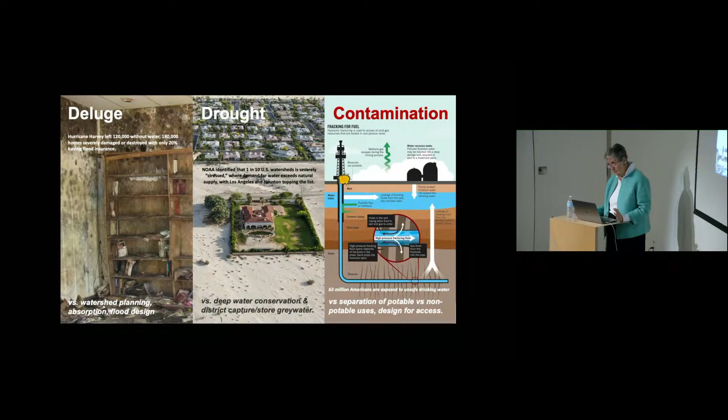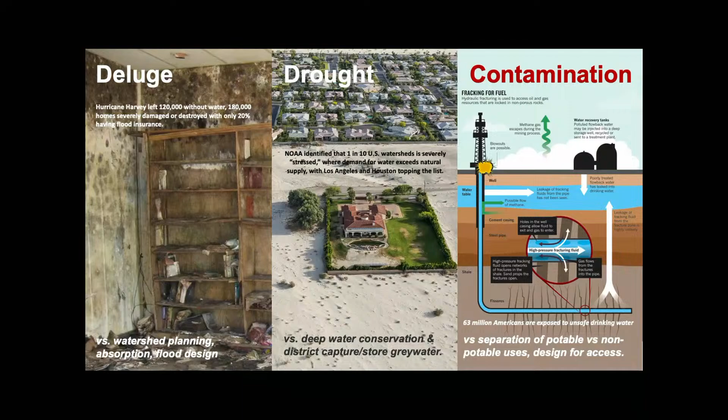So water resilience, what could possibly go wrong? There are at least 3 different variables we have to design for. One is deluge, both deluge rain and rising water. Second is drought, and the third is contamination. All 3 of these are pervasive in the world around us.

The important thing is to actually establish principles for design. Through the crowdsourcing, we've not only set principles, we've actually set some priorities. We're in the process of trying to create a book that would capture all of these good thoughts.

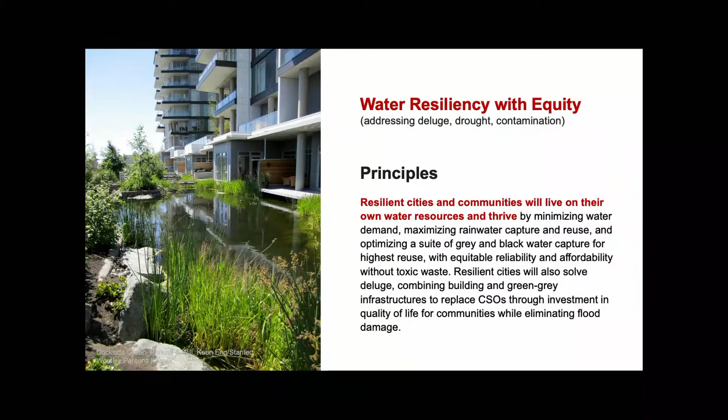Resilient cities and communities will live on their own water resources and thrive by minimizing water demand, maximizing rainwater capture and reuse, and optimizing a suite of gray and black water capture for highest reuse with equitable reliability and affordability, and without toxic waste. So that becomes a guiding principle.

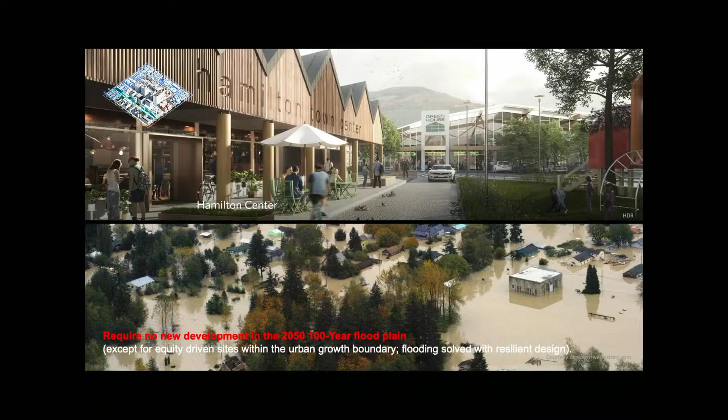What it ends up meaning is that we require all new development stay clear of the 2050 100-year floodplain. In other words, we no longer develop in floodplains, and we actually start to redevelop things that are in 100-year floodplains. Unless they're incredibly historic cities like New Orleans, we need to begin to help these cities move and relocate.

This is an example in Oregon of a town that was completely devastated by heavy rains, and the new town that has been built since then.

We would require that recycled water only is used for irrigation, toilets, fire suppression, and cooling towers, which, by the way, is a huge amount of the water we use potable water for right now, the water we need to drink. We would also incentivize a network of district or neighborhood black water systems, so you process black water locally instead of shipping everything back to a central sewage plant and water processing plant.

I want to share some illustrations. The profession is so far ahead of academe, they are absolutely embracing these standards. This is an example of Phipps Conservatory, a living building in Pittsburgh designed by the Design Alliance with CJL Engineering, Andropogan for landscape, CEC for civil infrastructure, and Turner Construction. By the way, it takes a team to make a resilient solution. It is never the architect alone; it is always the collaboration from the outset that makes these projects.

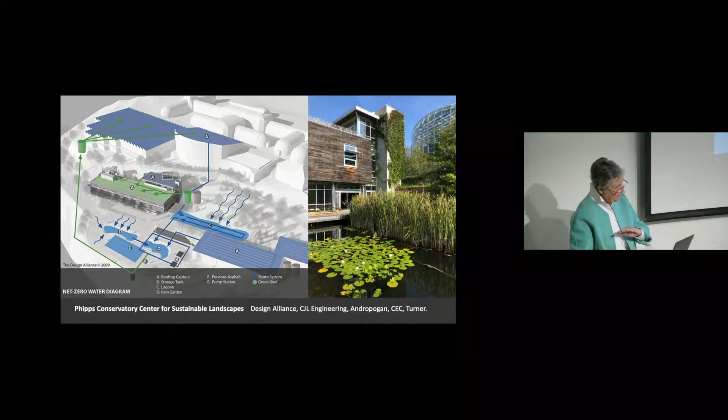This net zero project captures all of its own on-site water. It uses all of its gray water and storm water for all 4 of those things we just talked about, and it captures its own sewage and processes it back into gray water as well. So it's a closed loop system that's truly an innovative contribution.

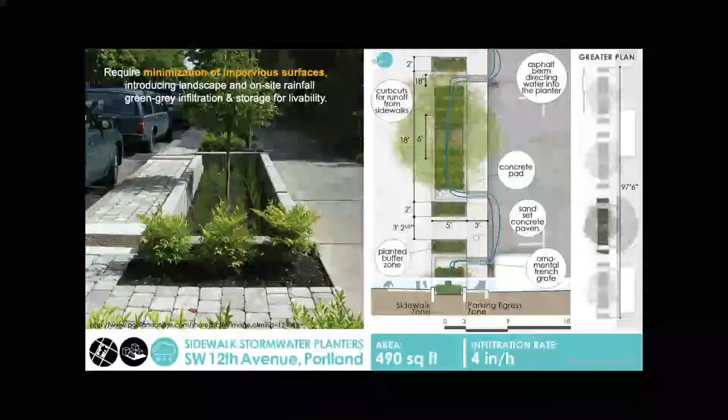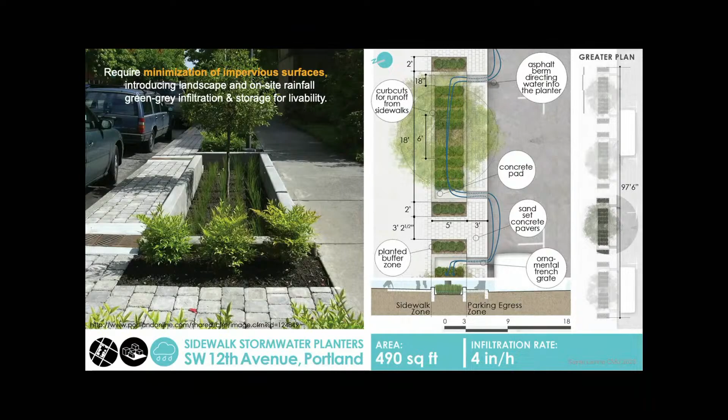Just a few more examples of water solutions out there. This is the city of Portland and how they cope with very heavy storms. Every sidewalk is a water storage system. Every time you design, you anticipate heavy rainfall and design things that can ebb and flow, and the water can rise and fall, completely transforming the quality of the street and its walkability, in the process of solving a major deluge water problem.

In terms of water processing, here's another example, Dockside Green in Victoria, Canada, a beautiful new development where they became the water and sewer authority for the region. They got major resources from the state to actually build the water and sewage system, which underpins a beautiful development where the creek running all the way to downtown Victoria is literally a cleaned gray water and black water system.

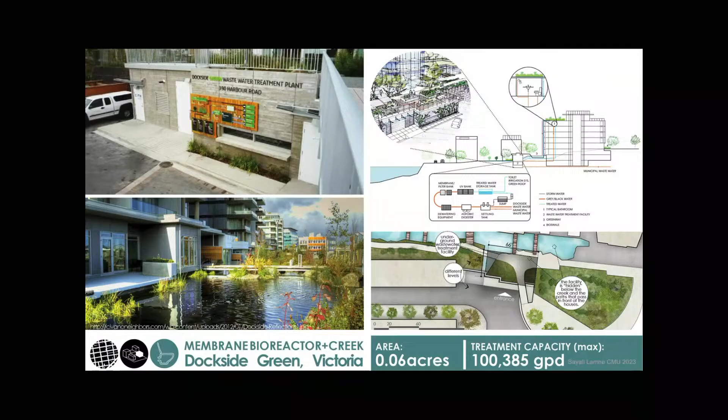The second major challenge we're trying to deal with is energy resilience, and we want to deal with this with equity. So what could possibly go wrong? Here you're looking at a major pipeline from the tar sands in Canada running right through Indigenous territory—talking about honoring Indigenous populations, nothing like cutting right through territory we don't actually own. What could possibly go wrong?

We know we have significant energy insecurity. On one side, people who cannot afford to pay their bills or are in areas without adequate access to energy. Then we have energy waste, those of us who haven't figured out how to cut down on demand, even when it's not needed. We've got significant issues of energy reliability and grid failure, and a peak energy challenge that will get even worse as we try to electrify all of our buildings, which is the agenda on the table right now.

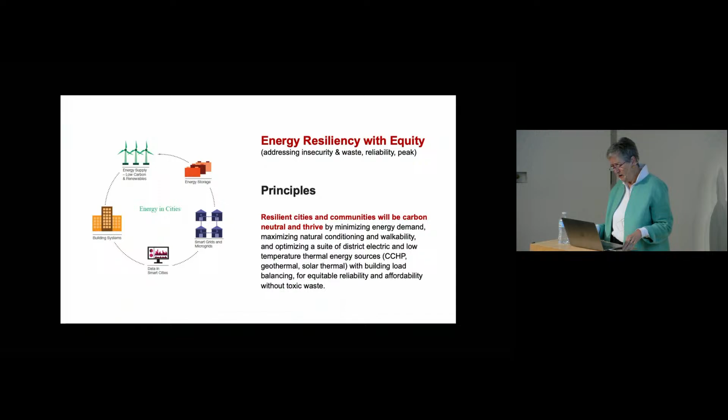The principle is that resilient cities and communities will be carbon neutral, and they will thrive by minimizing energy demand, maximizing natural conditioning and walkability, and optimizing a suite of district electric and low temperature thermal energy sources with building load balancing.

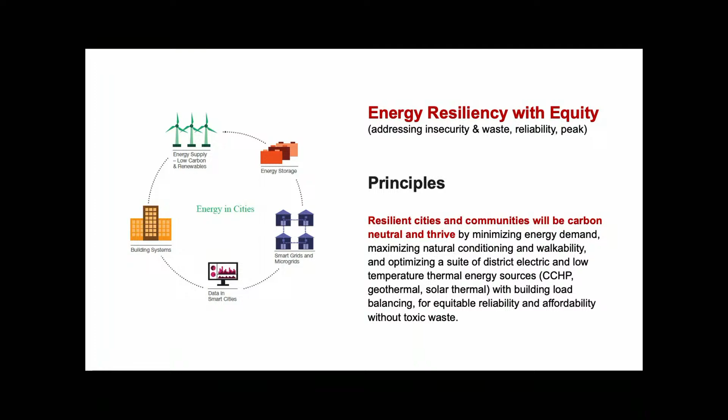We really have the potential here to become transformative as players in the built environment. The rules that come out are requiring energy and essential services to be able to survive shocks. So we're bringing our equipment out of the basement and up onto the roof. We're providing safe harbors for crisis moments, places to go, whether it's the library, the recreation center, or the school. This is for San Francisco—all buildings now off-grid or capable of being off-grid, so you have a safe harbor to go to.

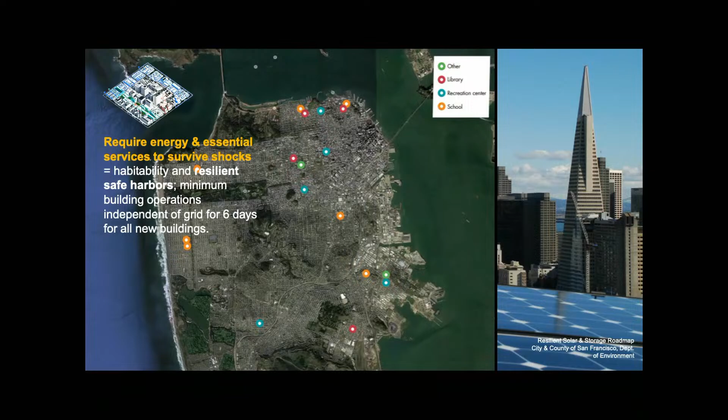We're looking at buildings that do grid integration. So we're generating power locally, storing it and using it locally, but also feeding it back into the grid—it's a two-way grid. So every building becomes part of the source solution for the future.

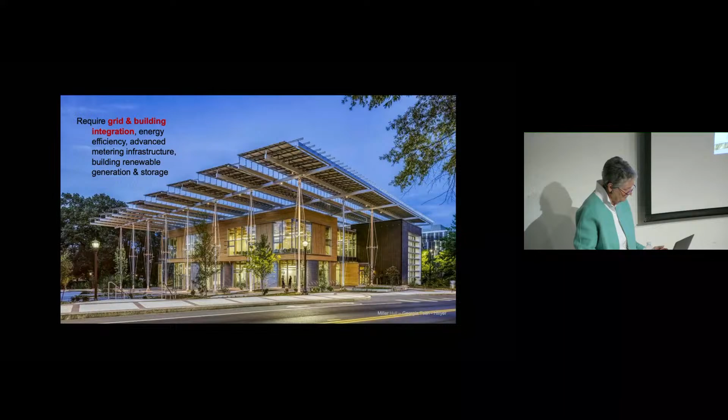Incentivizing buildings for daylighting and passive solar heating and passive cooling and ventilation. And we're going to start to zone so that we have critical mass to make walkability and mixed use viable.

This is where I live and work. This is called the intelligent workplace. We get a lot of razzing about this—people think, why do you get to call it the intelligent workplace, do you think we work in the stupid workplace? We say no, it's just called that because it took a team to create the level of learning and a living laboratory that we need to teach about the future of building systems and systems integration.

There's a team of us in the Center for Building Performance that were part of the design team. We worked directly with a consortium of industry players who knew a lot about glass and networking and lighting. And then we had Pierre Zoelly out of Switzerland, BCJ, Bohlin Cywinski Jackson out of Pittsburgh, and Ray Engineering and TEDCO for construction. It took a team to make a living laboratory.

It's not a big lab—about 7,000 square feet. It houses about 35 graduates and faculty, and we basically study the next generation of building systems for energy.

Number three, food. What could possibly go wrong? Well, number one, we have significant diet and food insecurity. We've got inadequate access to healthy foods for many neighborhoods. We've got food toxicity, with more than 1 in 6 Americans getting foodborne sicknesses every year. We've got substantial food waste—over 40% of our fresh and processed food goes into landfill. So we have these substantial challenges.

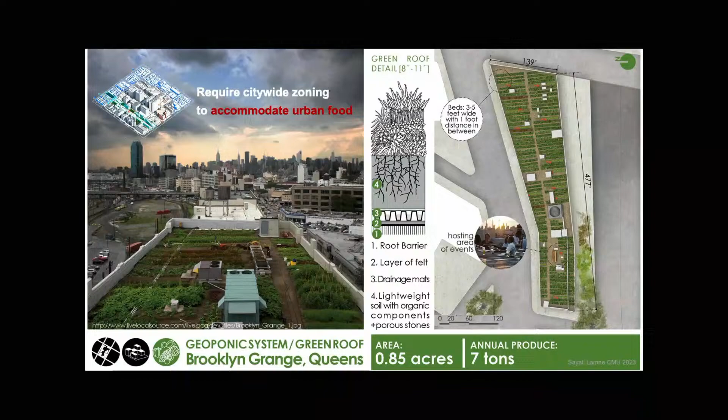It's time that we actually require citywide zoning to accommodate urban food. We need urban food because it's the only resilient solution. This is a wonderful master's thesis from Sayali Lamne at Carnegie Mellon, where she gathered case studies of how much food you could grow in our climate.

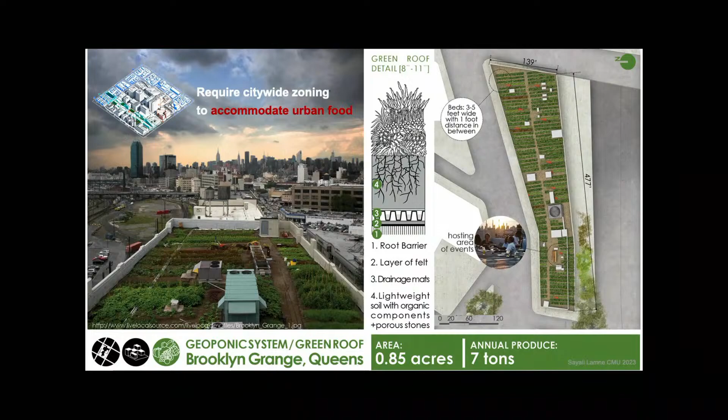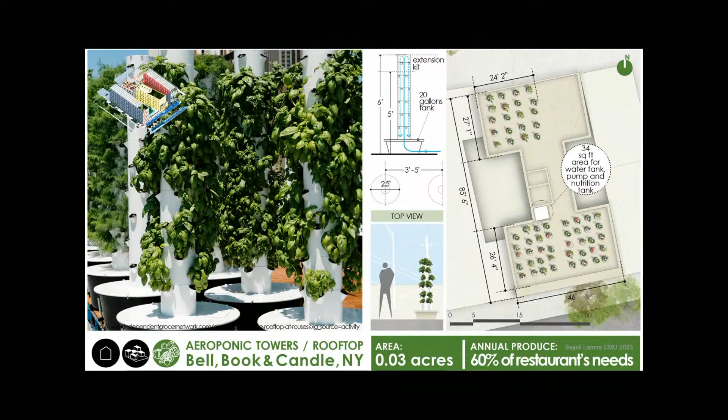And this, of course, is advanced aeroponic technology that lets you do even more with even less land. So we've got the potential for our cities to become healthier food sources. Again, the design community is way ahead of us.

This is Chatham's campus outside of Pittsburgh called Eden Hall—it's their sustainability education campus. It's a closed-loop food, water, and waste campus, so they can live entirely within the campus's own boundaries. It was designed by Mithun Architects with BNIM and Interface Engineering, CEC Civil, and Andropogon Landscape with Biohabitats as consultant. You'll start to see these names repeat—these firms are absolutely leading the way in how food and landscape are transforming our built environment.

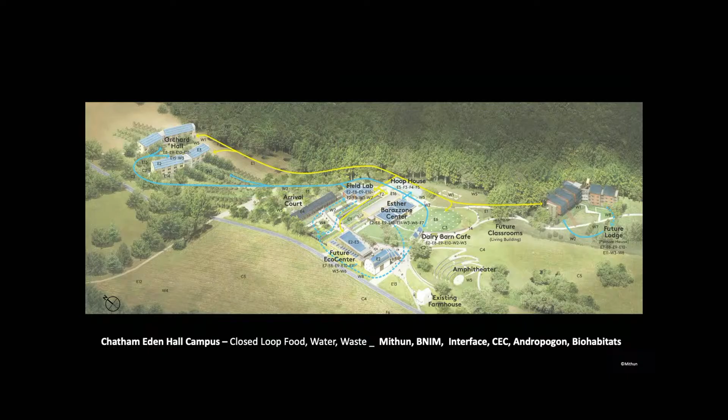It's a beautiful campus where they grow all their own food. They also have a fishery that uses the waste—the fish provide fertilizer for the vegetables—plus on-site PV, daylight, natural ventilation, and on-site training on how to serve local food. It's so delicious, such a fabulous venue to go out and eat or meet at. Beautiful project.

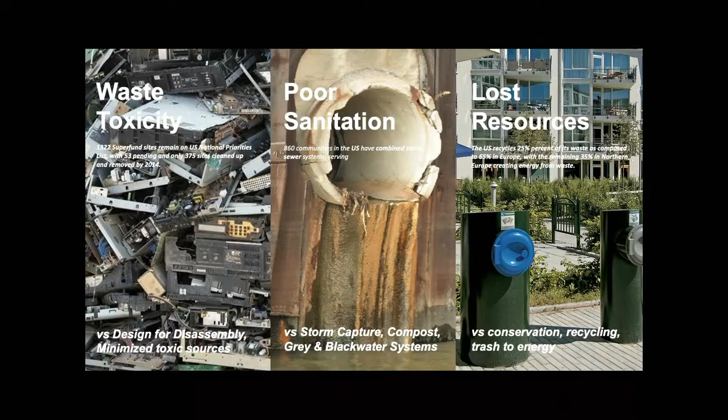Number 4, waste. What could possibly go wrong? Well, one, we've got substantial waste toxicity. Every computer eventually becomes obsolete and becomes part of the waste stream. We don't really have a way to take it apart and reuse all the good parts, so we have to toss the whole thing.

We've got significant poor sanitation problems because of combined storm sewers—we're essentially flooding our waterways with sewage in heavy rains, which is now illegal, but cities are having a hell of a time solving it. And we've got lost resources: about 25% of our waste is actually recycled in the US, whereas in Europe it's well over 65 or 70%, and in Scandinavia it's 100%, because what they can't repurpose they turn into energy. So waste to energy is a standard process in most of Scandinavia as a way of becoming independent from fossil fuels.

So what are the principles for waste? Resilient cities and communities will neither landfill nor export waste. Instead they'll treat the waste stream as an invaluable resource, in a cradle-to-cradle commitment to waste as industrial and/or agricultural nutrients. I'll come back to that—let me just end there.

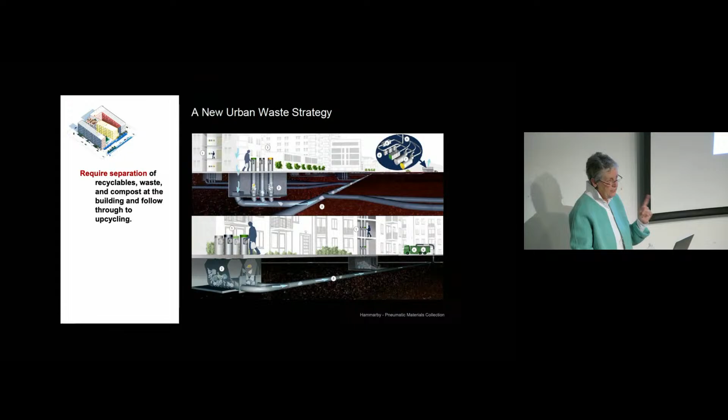What they cannot use here, they take to the central waste-to-energy power plant, and then they have a thermal loop that makes that more efficient.

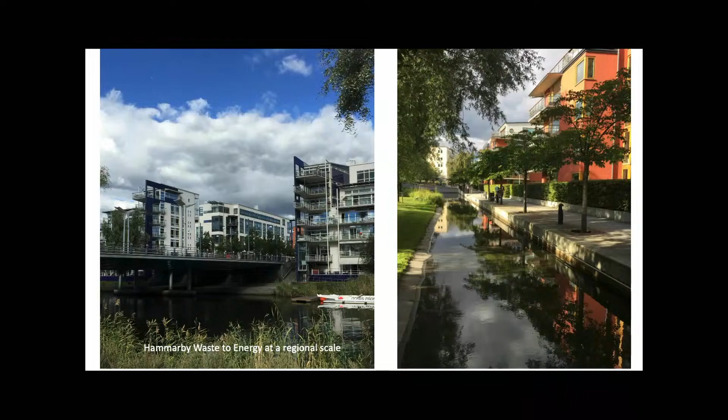Here's the community. The last time I was in Stockholm, I stayed at an Airbnb in Hammarby because I wanted to see this whole brand new community that's designed around waste and how you make waste into a positive community. It's a beautiful destination. It also does a huge amount with water and water management.

If we're serious about waste, we're going to have to incentivize long life buildings and long life building materials, because obviously we're tearing down buildings too quickly. We're not using them for the hundreds of years they should be designed for, and we need to incentivize flexible and convertible buildings. The designs have to be able to support change.

Office buildings are no longer needed to the level they were before COVID, and now what are we doing with them? Are they capable of becoming housing? Are they capable of becoming dorms? So how are we incentivizing the design for flexible and convertible spaces?

And what are the design changes? Not just how do we incentivize it, but what does it do to our structural grid? What does it do to our floor-to-floor height? What does it do to the access to outdoors? All of which are going to be important if we want it to survive.

There is no mass transit in this state. There is no other alternative for getting people out of this state. This is not sustainable. This is not resilient. We've got significant challenges with congestion and gridlock because we've been so car-centric for so long that we don't have a commitment to the alternative of cars.

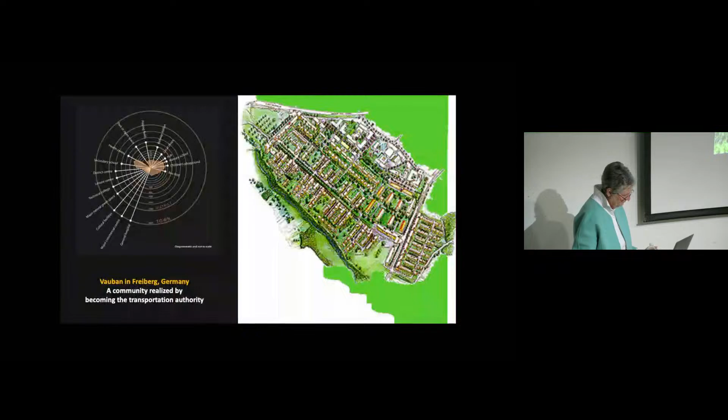One of the most interesting communities designed around transportation and mobility is Vauban in Freiburg, which was an old French army barrack for many years, then abandoned like many barracks throughout Germany. They went back and put in infill housing, converting the barracks into housing by looking at what needs to be within walking distance, what can be in light rail distance, and what can be in high-speed rail distance, designing around those distances.

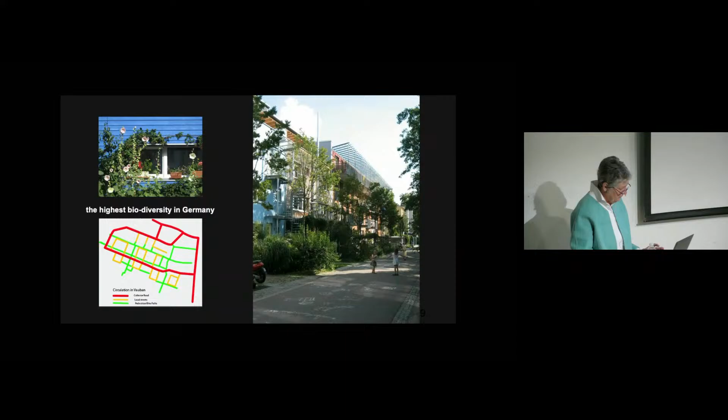It has the highest biodiversity in Germany because they took cars out of the heart of the development. There's a feeder road where you can drive in to drop off groceries or an elder family member, but by and large you park your car in a structured garage and walk. That way the kids own the streets, the kids own the greenways, and the greenways are pervasive. It's an amazing project, including the light rail that runs on a greenway.

It has the highest density of children in Germany because families with small kids heard about this development and started to emigrate to Freiburg, wanting to live where kids could run directly from the house into greenways, down to a creek, to horses. It's an amazing center, and there are a lot of seniors there too because it's a vibrant, multi-generational community living together. Number six: human health and safety.

What could possibly go wrong?

We've got natural disasters, but even without them, we have aging infrastructure that the American Society for Civil Engineers gave a D+ on the condition of America's infrastructure. We sprawled our way into an infrastructure so big that we don't have the tax base to maintain it, which is one reason urban growth boundaries are so effective—they stop sprawl and reintroduce density onto infrastructure we've already built, giving us resources to upgrade it as needed.

We've got significant human health issues related to heat and indoor air quality, and human health issues related to outdoor air pollution.

The principles are that resilient cities and communities ensure human health and safety in the face of natural disasters and aging infrastructure, eliminate sources of outdoor air pollution—mostly combustion—and protect sources of indoor air, daylight, and sun and shade, to ensure equitable access to healthcare facilities and safe harbors.

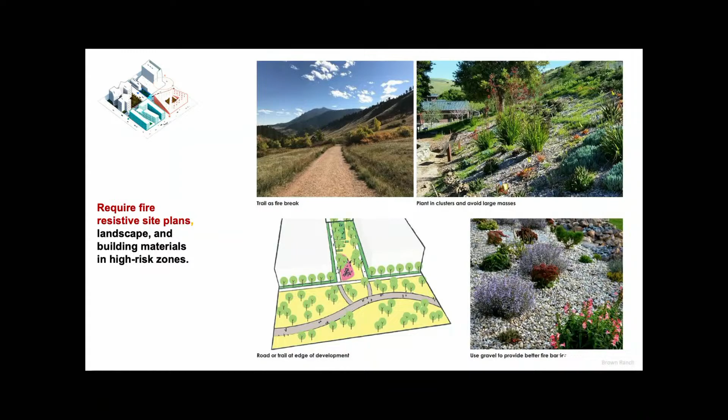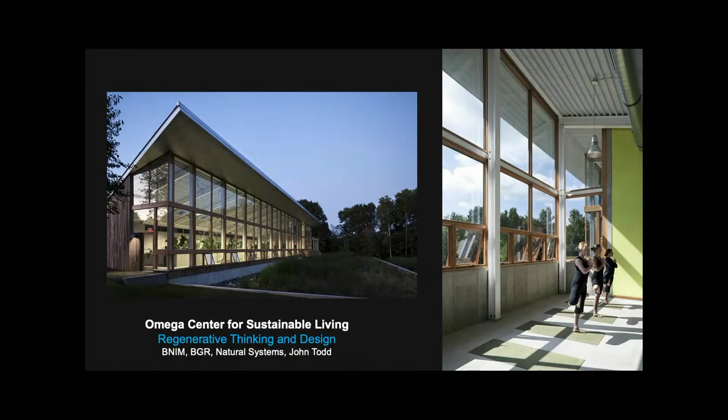And finally, ecological health. What could possibly go wrong with our ecology?

We've got a problem: there's no biodiversity and no bees in a lot of our development, and we really have to address this. So we're doing regenerative design now to try to reintroduce biodiversity and bees, while at the same time trying to design to address global warming with all its secondary manifestations and resource depletion.

Where we're using materials at a rate that is far, far faster than they can be resourced. So let me talk about those.

The principles are that resilient cities and communities ensure ecological health by achieving zero carbon to reduce global warming, by minimizing the depletion of non-renewable resources in material and system selection and reuse, and by maximizing biodiversity for a robust regional ecology. Those become the principles that we want to guide.

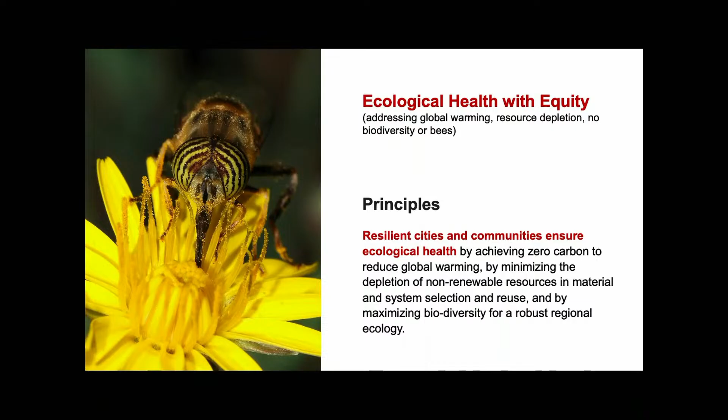It might mean that we require citywide habitat and biodiversity corridors and connected ecosystems, which, by the way, will also solve some of our water challenges and some of our heat challenges.

We're going to identify special habitat areas and pathways and nature zones that completely transform the way in which we think about development. We'd require a minimum green area factor so that we actually close the loop on water systems and increase the landing place for bees and insects and biodiverse landscape.

And then most critically, and the one I'm going to move to now, which is embodied carbon and operational carbon, we have to have a maximum of acceptable operational carbon and embodied carbon for every building function in every climate. And we need to incentivize zero carbon buildings, which are zero carbon because their operational carbon is net zero, their embodied carbon is net zero, their transportation carbon is net zero, and we'll come back to the net issue, and their water associated, the water energy nexus carbon is net zero.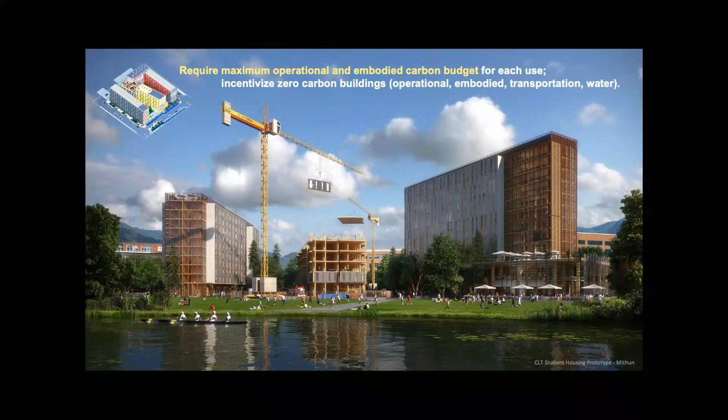I just want to make a point about embodied versus operational carbon. At the moment, America is so sloppy in our operational carbon that it is 5 times greater than our embodied carbon for the life of our buildings, if not more, right? So really, we have to get a handle on operational first.

As soon as you've got leading professionals who've gotten their operational carbon down to net zero, and I'll come back to that, then all of a sudden, we absolutely need to focus on embodied. But if we can't get our handle on operational, it's not going to make the dent we need. We need a big dent in this carbon equation.

In terms of understanding the embodied carbon, I think Cradle to Cradle and Upcycle, Bill McDonough and Michael Braungart's two books, are probably the leading texts on what we have to do to guarantee that every product we put into our buildings has to either be part of a biological cycle or a technical cycle, meaning it can actually be turned back into fertilizer or turned back into another technical product. And it's actually designed for disassembly in a way that allows us to do that.

So even a product that has multiple subsects - some products like carpet, you may have a backing that needs to be separated from the front, and then it turns into two different cycles. We have to be able to design for disassembly. And I want my laptop to be able to be disassembled so I can just fix the two pieces that really needed to be fixed before I buy a whole new laptop and throw this one away.

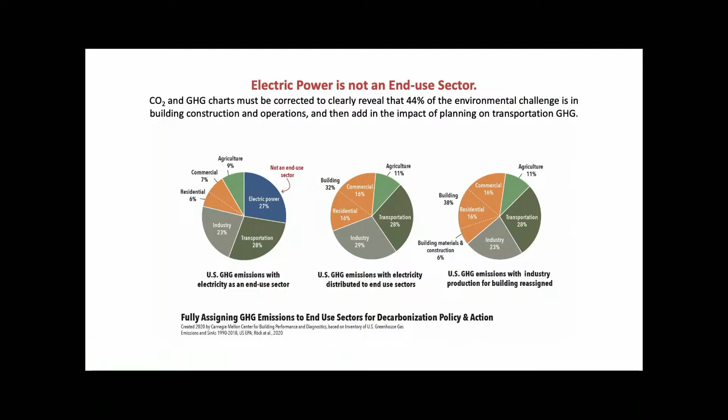So all of a sudden now, if I take that 6%, the buildings are 38% of the carbon footprint of this nation. It becomes a huge priority for the nation. You have to invest in buildings and building efficiency and embody both operational carbon and embodied carbon if we're serious about cutting our carbon footprint as a nation. You're going to have to make this case. All of you guys in the built environment are going to have to make this case to every audience you talk to, because all they see is that first chart. And it's killing me. I can't believe that I haven't convinced people to do that.

Now, so what do we have to do in the buildings themselves? ACEEE, the American Council for an Energy Efficient Economy, is a major source of information, and they put out a report on what we have to do to decarbonize the US by 2050. They basically said we're going to have to cut our energy demand by 50 quads. That's a huge number. Let's just remember the word 50. I'm not making you guys memorize quads, 50 is the number. What do we do in the built environment that gets us at the 50?

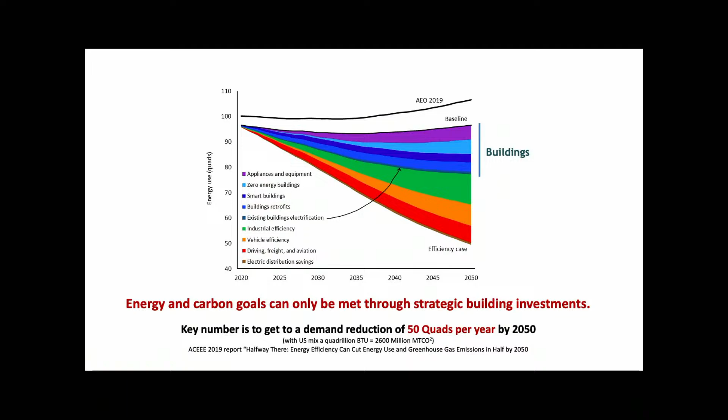Number one, we do zero energy new homes in commercial buildings. As soon as we do that, we have a 5.7 quad reduction by 2050. If we continue to do this, we can do 10% of what the ACEEE says has to be done for the nation to meet its commitments to the Paris Agreement.

Massachusetts is a leader, they've set all kinds of landmark zero energy codes, and it's great. California is a leader, New York State is a leader, Pennsylvania is a lagger, right? Sorry. We're not setting zero energy goals as a state or as a city, and it's critical that we do that.

Can we as professionals do that? Absolutely. Leading professionals can absolutely reduce the footprint of buildings down to 30% of where they are today, and all of a sudden it can be met by renewables that are either on the building or in the community, so that's how they get to net zero.

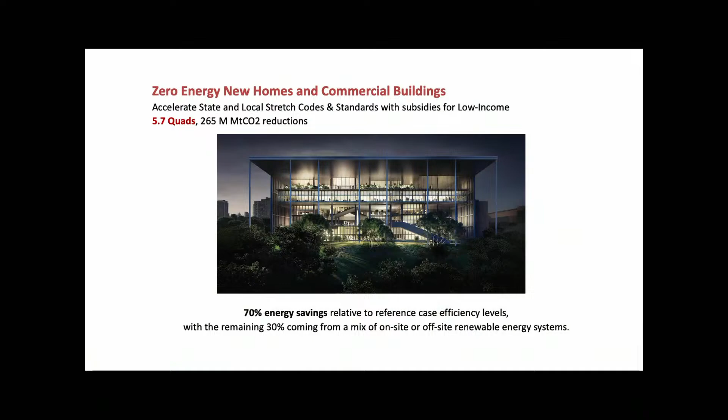And I just want to show you, this is HOK's incredible track record relative to the 2030 challenge. So the AIA joined the 2030 challenge. There are over 1,500 firms in the United States that have pledged to not only baseline their buildings, but to show progress year over year on everything that leaves their office, any of their offices. And they do both major renovations and new construction, and they baseline them.

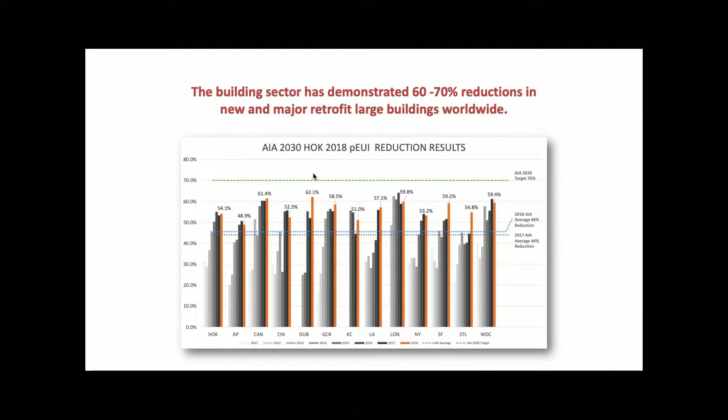And so you're seeing here, this is Canada. So they're basically saying, here was our energy use index back in 2013 when we started tracking, and this is now how much reduction we have towards this target of 70%. And you can see here, every one of their offices is somewhere between 48 and 60-some percent. They're literally pushing their portfolios.

And now the architects are coming to the clients and saying, we could do a carbon neutral dorm for you if you will basically fund a very marginal difference for geothermal wells and PV on the roof. We're so close with our carbon footprint being so small, our operational demand is so small that we can meet it if you will actually fund it, and of course universities are planned to be in business for the next 50 years.

They should absolutely be meeting. These things pay back in 7 or 8 years. Really, you should of course be doing it. Of course, our university said, oh no, it's too expensive. We can't do the PV and the geothermal. Just give us a low energy building.

So this is what the firms are doing. They're out there tracking their own. And if you guys all don't know what an EUI is, you better know before you graduate, because the firms are designing to energy use intensity goals, and they're all committed. They really are, across every scale of firm.

Again, once we get operational carbon in control, these firms are so close to being at carbon neutral that now they're basically focusing on embodied carbon. And they're doing that by reducing the amount of concrete they're using, reducing the amount of steel, replacing steel with wood, doing composite structures where wood becomes dominant. In Norway, buildings are measured by how many weeks of forest growth is necessary to build the building. It will be labeled a 6-week building. This whole building is 6 weeks of forest growth. And so they're really looking at the renewability of the raw materials in their building.

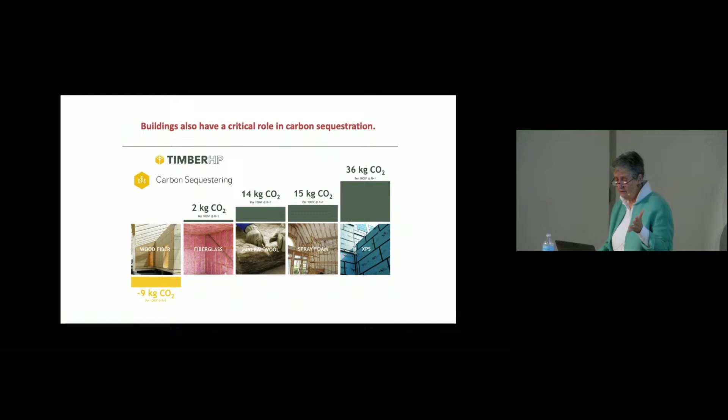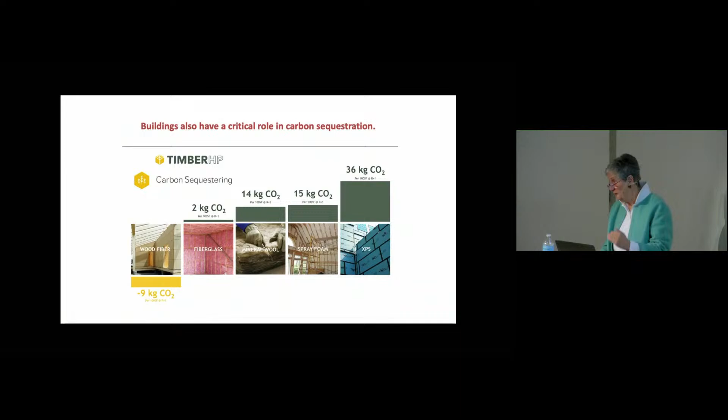That was another big fight I had. I did not win with the National Academy Committee because they feel we're going to have carbon sequestration that pumps our CO2 waste deep into the earth or deep into the ocean. They think that we'll never make it to the 2050 goals if we don't pump it down, which is literally taking your trash and putting it somewhere else and saying, maybe it won't come back up. I'm thinking, oh, this is not working. Let's just start to use buildings as part of the carbon sequestering future.

Architecture schools very rarely talk about hardware in buildings. And yet, as a professional, you spec a lot of hardware. You and your consultants will spec your heating system, your hot water system, your lighting system, your refrigerator, freezer. If you're a grocery store, that becomes the big energy demand. Of course, air conditioning, your cooking, your clothes drying, all the plug loads that you're going to put in. Everything we put in buildings is key to us getting to low operational carbon.

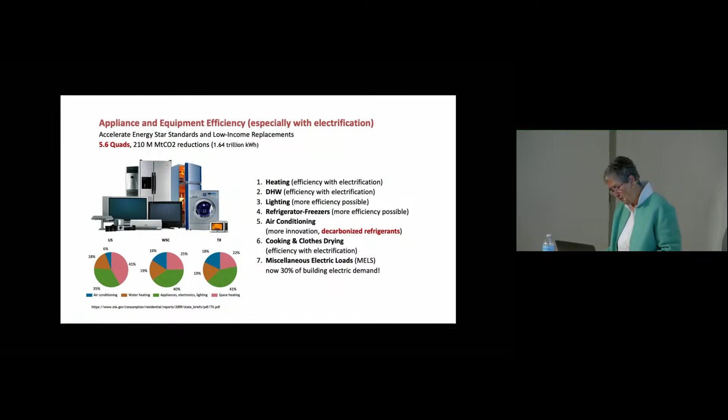And there's about 5.6 quads of efficiency that we have not taken as professionals. And so, again, when all of you guys leave, you're going to be out there in the forefront of making low carbon buildings, including all the specifications that you put in those buildings.

America's way behind on district and combined heat cooling power. We do have some, many campuses have district systems. They're typically district steam, which is not particularly efficient and very hard to manage. When you go to Europe and you start seeing district hot water systems, these literally take a power plant, and all the heat that would normally go up the chimney of a power plant - 70% of the energy in the power plant goes up the chimney, 30% is actually electricity for us. 70% is waste, which is why source energy is triple site energy, is that inefficiency at the power plant.

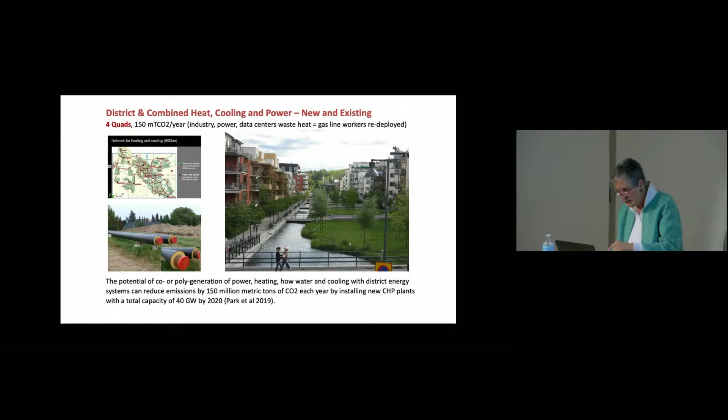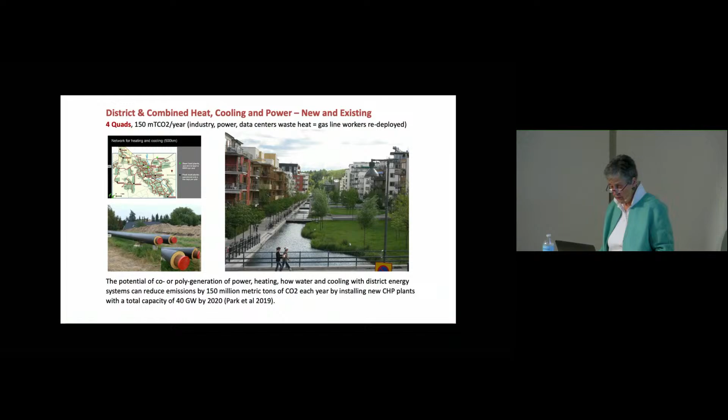If you can recapture the smoke that's coming out of the power plant as heat, which is easy to do, and you put it in very shallow pipes - in this case, you can see the miles of piping in Stockholm that just takes energy from the power plant and gives it to every household for free. You just plug into the heating network from the power generator. This, again, is Hammarby. There are other examples throughout Europe.

Then there is retrofits. We have a huge challenge with retrofits. There's about 3.8 quads of efficiency if we could aggressively start to make our buildings better. This is also a huge equity issue. This is the moment where we can go back and pay deference to the amount of inefficiencies and the sad condition of many poor households. This is the moment for us to literally pay back and make super efficient.

Passive house is absolutely a great standard, certainly for the colder climates in the United States, because it literally takes us into extremely low energy, things that could be met with on-site photovoltaic or community PV. So we could meet the loads on the site and make carbon neutral retrofits.

Now, this gets at some of the high-tech questions. I am a fundamental believer that we need both advanced technology and natural technologies. I'll end with natural technologies because I really think that's our command as architects. It is absolutely true that advanced LED light bulbs have literally taken the lighting loads of buildings down to 20% of what they were. It's huge, the advantage of that innovation.

Controls. Smart buildings can take our loads down by a lot. This is a federal building we've been tracking the energy use of, and you can see the building from when they had lousy controls to when they instituted better controls. It's a huge drop in the electric demand through control technologies. So there's no question smart buildings and controls are a wave for the future—about 3.2 quads out of our 50 that we can achieve through investing in buildings.

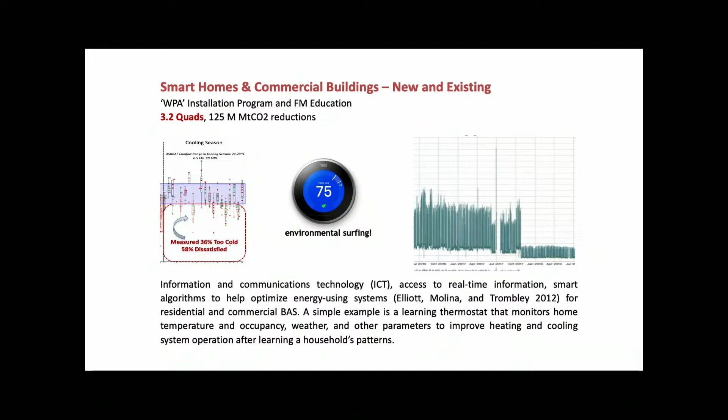Which brings me to nature. Before we talked about advanced technology; natural technologies are the perfect marriage. I use the term environmental surfing because surfing is fun, and because surfing requires effort. Surfing is not something you just flip a switch for—you physically get engaged. When you want daylight, you have to be active to make daylight work for you: daylight without glare, daylight without overheating. Passive solar—you need to be active, because passive solar only works when the sun is out. So natural ventilation requires windows that open.

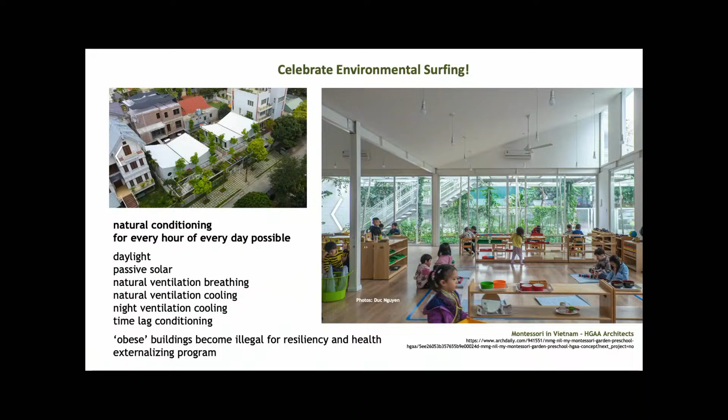We can do natural ventilation for breathing air. We can do it for cooling. We can do night ventilation for cooling with thermal mass and time lag. All of these are passive conditioning strategies. And if we surf the environment, we can meet a third to a half of the load of the building, if not more. So let me talk about each of those quickly.

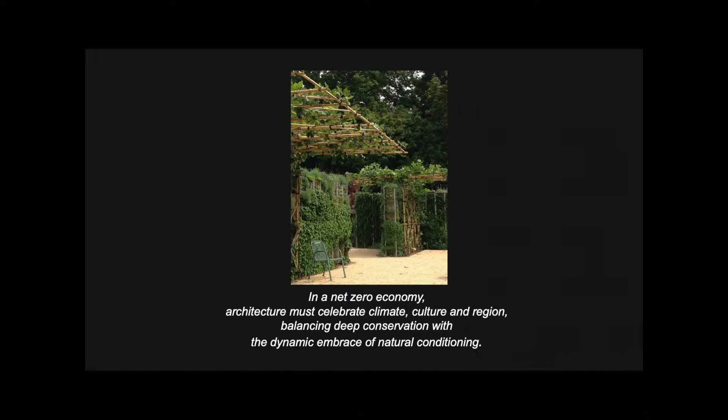In a net zero economy, architecture must celebrate climate, culture, and region, balancing deep conservation with the dynamic embrace of natural conditioning—literally doing super efficiency and embracing nature together. Deep buildings that are static, where it doesn't matter what time of day or season it is—dark glass, trying to cut out the daylight in order to cut out the heat—these have to disappear. These buildings, by definition, lock in a chemical soup of materials and occupant activities, and there are serious health consequences for humans, including asthma, skin and eye irritations, reproductive health issues, and cancer. This is not the solution—these dark, sealed boxes.

These deep buildings also have windowless workspaces. They lock out natural conditioning resources. They don't have passive solar heat. They don't have daylight. They don't have natural ventilation. They don't have passive cooling. And they completely block out nature's renewables, because nature is offering us free conditioning and we're blocking it.

Instead, we'll design for environmental surfing. We'll maximize natural conditioning, which is unique to every climate—there's not a single answer you can ship around the world. Every climate will have its own magic suite of environmental forces. We'll use less energy, less water resource extraction, and produce less pollution. We'll maximize local materials with less transportation and toxicity, and we'll reduce technological complexity with just-in-time, just-where-needed technological innovation. So I want the operable window and the mechanical cooling, but just in time and just where needed—not everywhere and sealed.

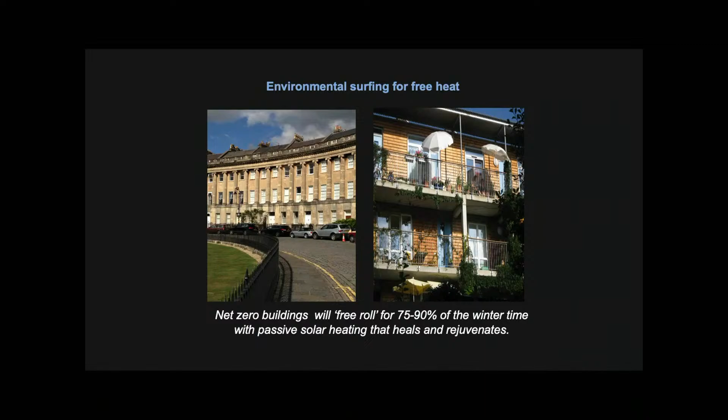So we can environmentally surf for free heat. That can give me, in a passive house, 75 to 90% of the heating I need. It's a super efficient house—it takes very little solar energy to heat it. So all of a sudden I can meet the heating load, and I'm resilient. If power goes out for two weeks, I'm okay in a passive house for two weeks. If power goes out in a badly insulated, non-airtight building with no solar contribution, I can last about six hours without heat. We're literally building resiliency through nature and through efficiency.

And it makes for more delightful spaces.

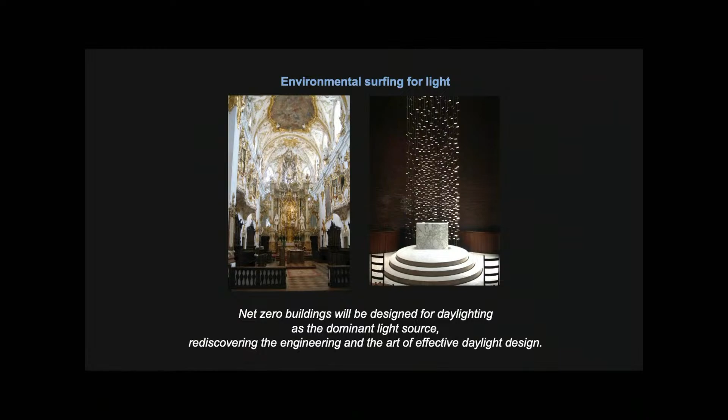So we need to rediscover the engineering and the art of effective daylight design. Daylight can displace somewhere between 35 and 75% of today's lighting, and if we rose with the sun and went to bed with the sun, we could do 100%, right? So resilience-wise, we could survive without electric light if we needed to.

We should be environmentally surfing for fresh air. We should not be relying on mechanical air only. We should absolutely be providing fresh air and natural cooling.

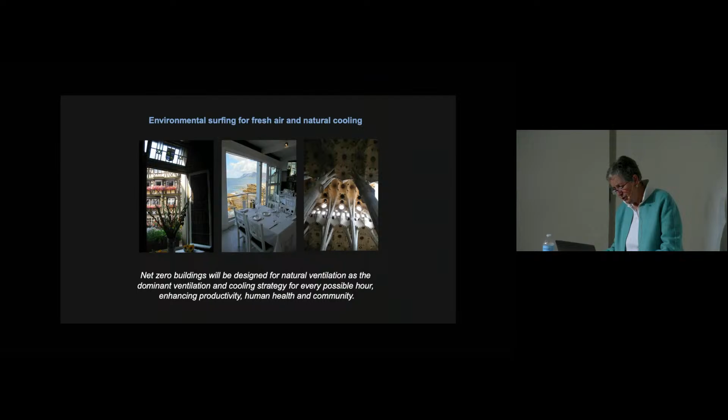Just quickly talking about thermal mass - look at the Sagrada Familia, Gaudi's church in Barcelona. It has a lot of exposed concrete, carefully crafted into exciting, explosive structural elements, and they run outside air all night long through the cathedral and out the apertures at the top, pre-cooling all that mass. So when they close the doors in the morning, the space is cool enough to handle thousands of visitors the following day without a central air conditioning system. It's truly impressive what time-lag cooling can do as nature's free cooling.

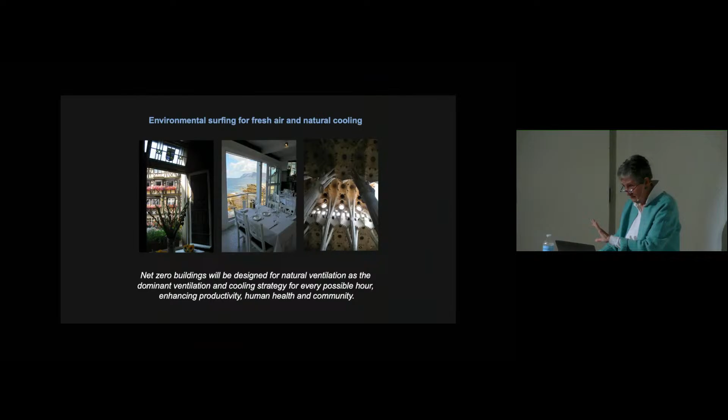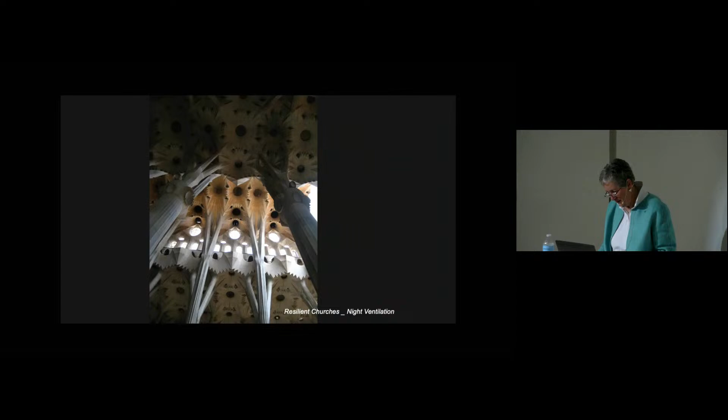And here's the Sagrada Familia for night cooling. Shade is an integral part of the use of sun and light, so we need to design dynamic shading, not static shading - things that change with the time of day and the season. Trees are magical. They always know when it's too hot and when it's not, and they just do it all by themselves, dropping all their leaves and letting the sun shine through.

So if we don't use trees, we need to do something that's pretty magical - that can dynamically step up, be rolled up, and change by season and time of day. We want to design for open windows. To do that, I need an engineer who does mixed-mode HVAC - heating, ventilation, and air conditioning engineers.

If I interviewed for a project at Carnegie Mellon, and I would do the same if I were here, I would ask the engineer, have you done any mixed-mode buildings? And if they say, what does that mean?

Then you say, thanks very much, and you let them leave. If they say, no, but I'd like to, that's at least an open door. Ultimately, mixed mode means that you're designing a mechanical system that allows you to still open the windows.

This is non-trivial because most mechanical systems in the United States, which we've now exported around the world, rely on a sealed building. They rely on variable air volume air distribution to get air to every corner, and they essentially want a sealed bubble so they can blow air into it, and that means you can't open the window because the air will go out. So mixed mode is the marriage of natural technology and advanced technology.

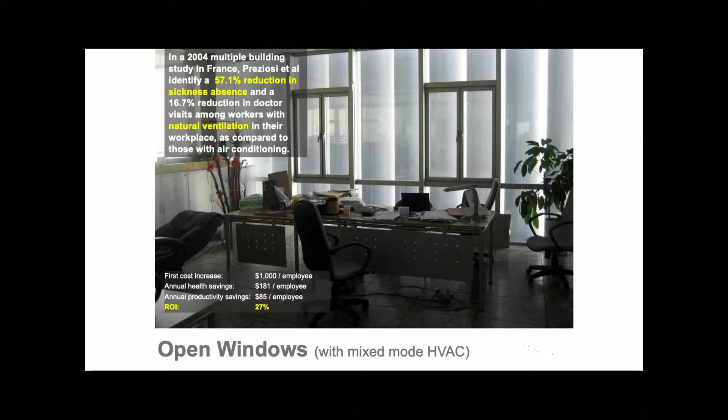We're going to need to increase outside air because it turns out we've been starving people for breathing air. As a consequence, people get flus and colds and COVID, and they get asthma and allergies. Everything that's in the space becomes essentially a toxin, and we breathe it in, and then we don't feel very well. So ultimately, it's becoming clear that the researchers are saying you've got to blow more air.

Or maybe you let people open windows. Maybe we do a combination of blowing more air and letting people either work outdoors or let more outdoor air in. This is just an example of some of the research. You're more than welcome to this whole PowerPoint after this talk if you want it, and you might read some of this research.

We've been out trying to find the economics of low energy, high nature buildings, and this is an example where Shaughnessy found a 14% improvement in math test scores in school children whenever the ventilation rate was doubled over code minimum. They found kids were literally doing better at everything. That's a pretty good argument, and you can see there's a 1,200% ROI on this because it doesn't cost much to double the air. It has an energy penalty, but it's $2 per student per year.

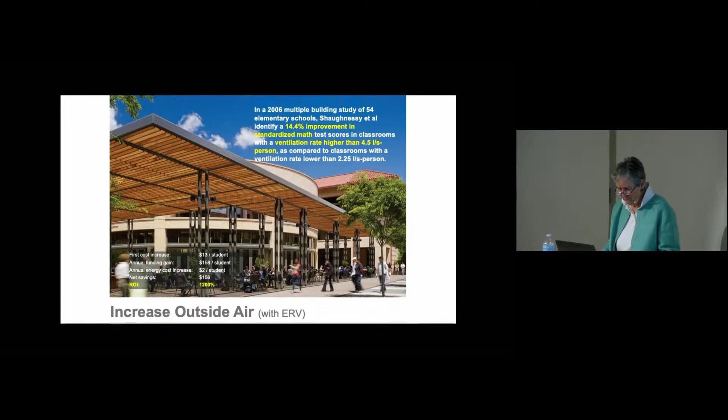We're going to provide task air. We're going to try to figure out a way to get air to the nose instead of to the bubble, because the bubble's not doing very well. The bubble will take someone with a cold in this corner, and if it's blowing from that corner, it's going to give that cold to me because I'm downwind from that.

We are definitely going to try to eliminate outgassing, so when you spec products, we're looking for products that do not have toxicity in them at all. We're looking for next generation natural materials that aren't bonded with formaldehyde and other things we don't want people to breathe. Research in Australia showed that when households eliminated formaldehyde wood products, no composite wood, those households had 60% less likelihood of asthma and 63% less likelihood of allergies in the kids living there, which is a pretty good argument for not buying composite wood.

By the way, this research, back in 1996, changed IKEA's entire production line. This research alone convinced them, you know what, we need composite woods because it's cheap, but we're going to find a completely different way to hold those composite woods together.

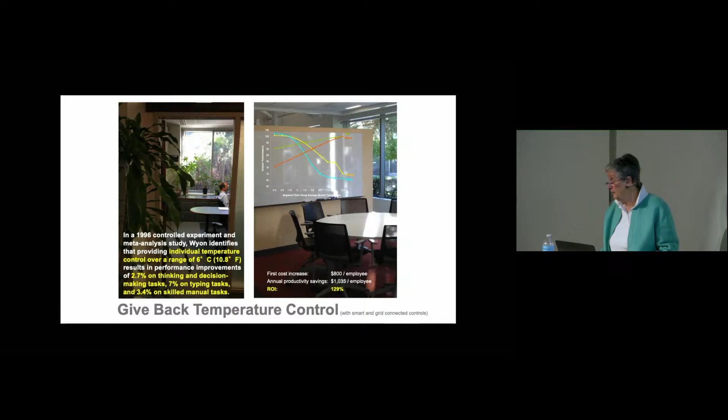Research is really critically needed in the built environment. We want to give back temperature control. We are going to use smart and grid-connected controls. We really do want, I'm here, and I can remotely turn off my heat at home, because I'm here, I don't need to keep the space heated to 68. I can drop it to 58 because there's nobody there. So there's so much we can do now with smart and connected controls. You could even let the utility control for you if they're getting into crisis with peak power.

We want to make daylight dominant. We want to integrate smart LED with that.

We want to separate ambient and task light. We are blasting light. Now, studios are an interesting challenge because you don't quite know where the desks are going to be. So you basically blast light everywhere and get a uniform 500 lux on every surface. But you may not need 500 lux on every surface. And of course, it makes it a relatively bland space.

So if you can find ways to lower the ambient and provide task lighting—these task lights are 6 watts, tiny, amazingly powerful. I can get much higher light on my horizontal surface with a task light than I can from a ceiling fixture that's way up over my head. So we're beginning to see ways to separate ambient and task. And the task light should probably have an occupancy sensor, so when I leave the desk, that extra light just goes off because I'm not there to use it.

We want to maximize views. This study was done by Heschong Mahone for the California Energy Commission. They looked at call centers and found that any call center worker who had a seated view of green space had 6 to 7% faster average handling time, meaning they could process the concern of the person on the phone more effectively than peers without views of green space. This is a direct productivity gain in a call center, which helps pay for a more articulated building with views of green space for every worker. These are not particularly highly paid workers, so justifying seated views for a call center is a real advantage.

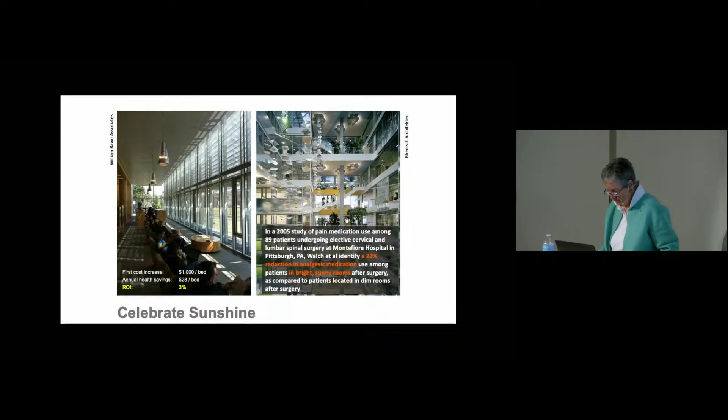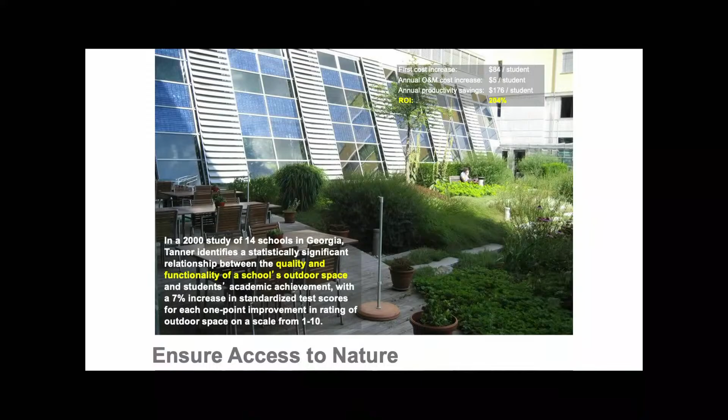Ensuring access to nature, outdoor—I'd really love to leave you with one basic agenda: take every program you're given in your studios and figure out how much of that program can you externalize from the conditioned bubble. How much can you make outside of that? Whether it's shared stairwells or additional learning spaces, the more we can put outside the bubble, the smaller the area we actually have to condition, especially in the face of power outages and others.

This is a study done on 14 schools in Georgia where they looked at children's schools and whether they had outdoor spaces. They scored them based on a rating system and found substantial improvement in children's performance the more outdoor learning space they had and the more diverse those spaces were.

The term biophilia was coined by Erich Fromm many years ago and then codified by E.O. Wilson at Harvard and Stephen Kellert at Yale in a book called The Biophilia Hypothesis, which basically said humans have an innate need for connection to living things, that we thrive on that connection. Nature holds the key to our aesthetic, intellectual, cognitive, and even spiritual satisfaction, as E.O. Wilson wrote. So biophilia is basically everything I've been talking about in terms of natural technology—it's views, it's daylight, it's solar heat, it's natural ventilation, it's access to nature.

And beyond that, there are things we have research on, but we don't have as much research on—do we have to hear the sounds of nature?

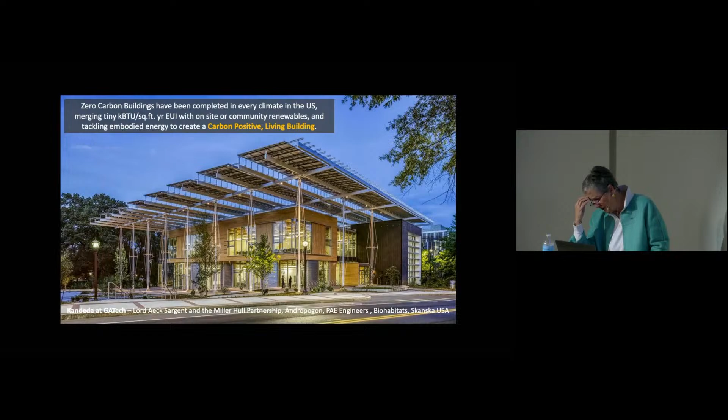Lord Aeck Sargent, and Miller Hull were the architects, Andropogon were the landscape, PAE Engineers were the engineers, Biohabitats again, Skanska was the construction. It takes a team to make these projects.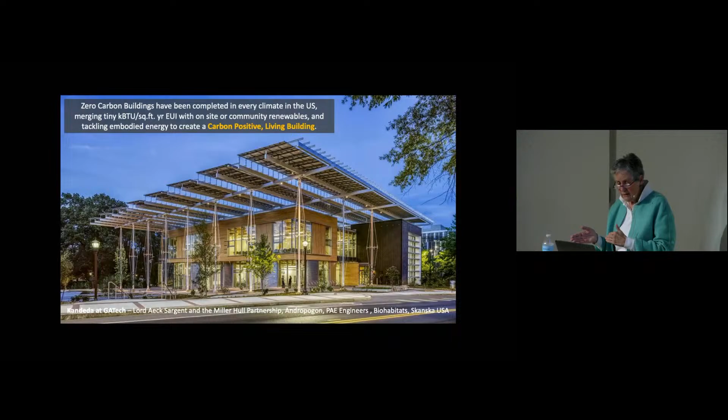These buildings have been done now—zero carbon buildings have been done in every climate in the US—by taking very, very small energy use intensities. The kBTU per square foot are tiny in these buildings. This particular one, I'm going to say, might be 35 kBTU per square foot, which is not as tiny as it could be.

And then they meet that load with on-site or community adjacent PV. In this case, they made it on-site, which is why the PV panels are as large as they are—because they're meeting the entire load, in fact more than the load of the building. And they have made this a carbon positive building.

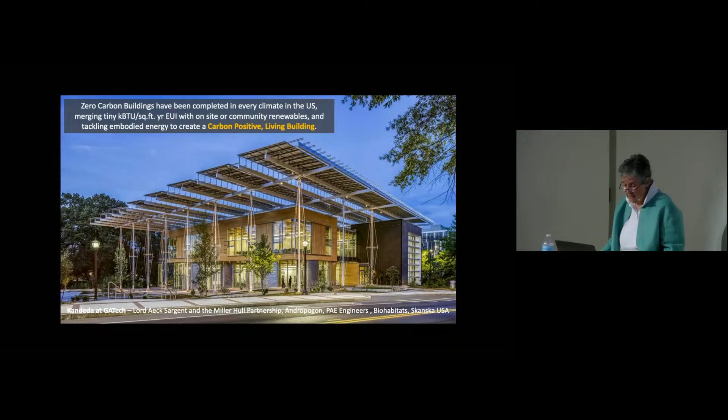Also, it's a cross-laminated timber building, so they've completely addressed the embodied carbon challenge. It was 30 kBTU there, I wrote it down.

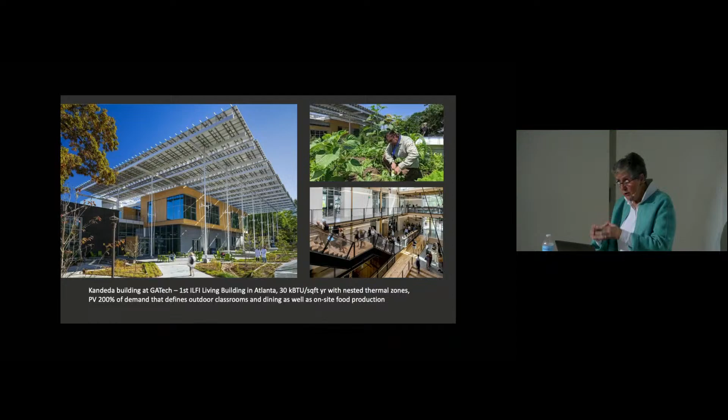It has nested thermal zones. They're not conditioning all the spaces to the tightest thermal requirement. Where you sit in a classroom, you need a tight thermal environment; when you walk from a classroom, you don't need a tight thermal environment. The PV is 200% of the demand, so it meets double what's needed for the building itself.

It has a lot of outdoor classrooms. It has outdoor dining. The entire roof is an accessible roof, so they have roof gardens, and you can sit out there and have lunch—it's an amazing building. Every campus needs a Kandeda building, right? Kandeda was the foundation that paid for the cost differential to make a building that was net zero and living.

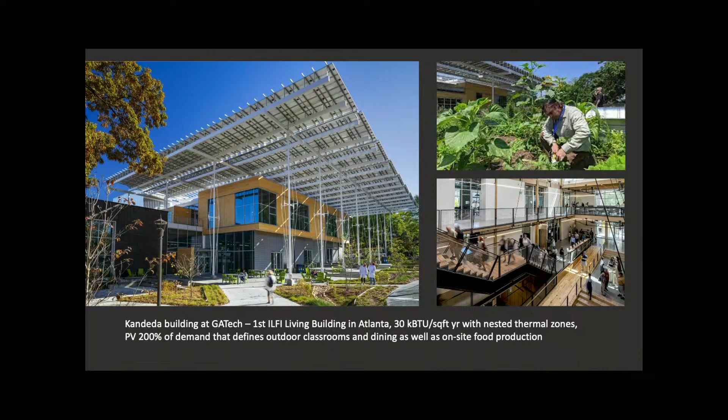And with that, I'm going to close and answer questions.